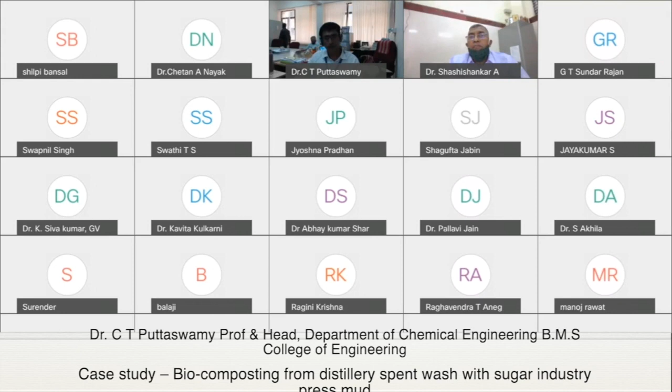It's my privilege to introduce the speaker of today's afternoon session, Dr. C.T. Puttaswamy. Dr. C.T. Puttaswamy graduated in chemical engineering from Bangalore City, and he did his post graduation in industrial pollution control from NITK Surathkal, formerly known as KREC Surathkal. He did his doctoral program with the PhD title Process Optimization and Ethanol Production from Hemicellulose, Bioenergy and Environment from Visvesvaraya Technological University, Belagavi.

He has more than 4 years of industrial consultancy experience before he joined in September 1999. So he has more than 20 years of experience teaching graduate as well as postgraduate environmental engineering and biochemical engineering students. He has guided more than 40 UG and PG final dissertation works, and he has more than 15 international and national publications.

One of the important awards he received is the State Environmental Award 2017 from the Department of Forest, Ecology and Environment, Government of Karnataka, with a citation of 1 lakh, in the individual category, which gives us the honor to be his colleague. He has carried out more than 15 lakhs worth of consultancy works, and he is affiliated to many professional bodies. He was a TEQIP 2 nodal officer, and moreover he is a man of simplicity and a down to earth person, which adds a feather to his cap.

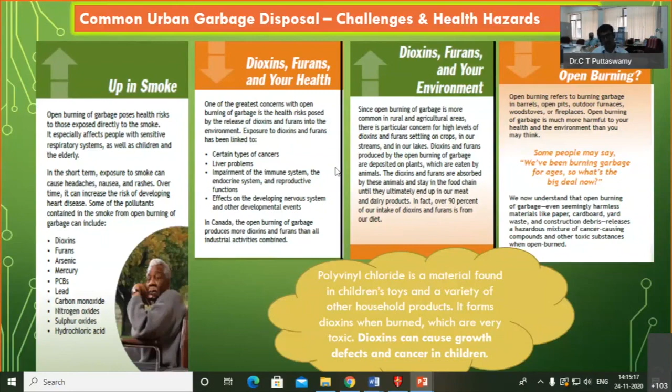So we made an attempt to check whether furan and dioxin were present. But with the available monitoring protocol, we found there was nothing, because no dioxin- and furan-producing material was incinerated in the magnetic pyrolysis. That might be the reason for the absence.

This is the Ecomac municipal waste decomposing machine. This is why I called it a marvel technology. It is a technology developed by a Chinese company, and they transferred the technology to India. A company bought this technology, and they are fabricating it in India, in Bangalore, Karnataka. They are supplying it to some municipalities, some industries, and decentralized waste management facilities.

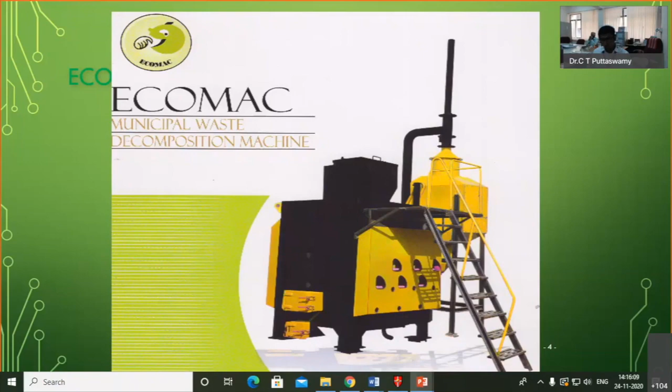But why I call it destruction is because I'm burning rich organic material and not getting anything out of it. That is why it is called destruction. This Ecomac is a unique garbage decomposition equipment using magnetic heat technology, called magnetic pyrolysis or magnetic plasma incineration. It works without using any fuel such as oil or electricity. As I told you, it's developed in China.

These are some of the features of this system. Magnetic heat technology, and only the control equipment, the scrubbing operation, requires electricity, and that too with negligible power consumption. The feed garbage is the fuel for the equipment; whatever garbage we use will act like a fuel. We can call it mono or co-incineration. It reduces landfilling substantially, because waste dumped in a landfill takes many years to degrade, and recovery or remediation is a cost.

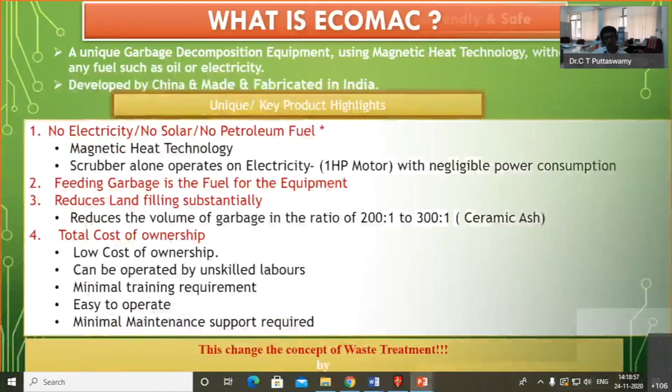Next one, what all it can incinerate, this magnetic pyrolysis actually. Except glass and construction C&D waste, construction debris, and maybe plastic. Even plastic also it will incinerate, but they avoid it actually. All these, even leather, plastic, vegetables, food waste, or maybe animal bodies, or to some extent other mixed waste. You can see all these, maybe a fiber.

Only the moisture is the criteria. We cannot put waste with moisture more than 65%. Anything which is less than 65% moisture can be incinerated using this magnetic plasma pyrolysis. What cannot be incinerated, as I told you, is building debris, stone, metal scrap, metal cans, and glass, which cannot be used for incineration.

Maybe we can try. It might be converted into some solid ingots. It might not be completely converted, that's what I feel actually. Seeing the system, the technology, it can be reduced into a solid mass. I think if it is tried, it can be checked actually. Somebody has to do it.

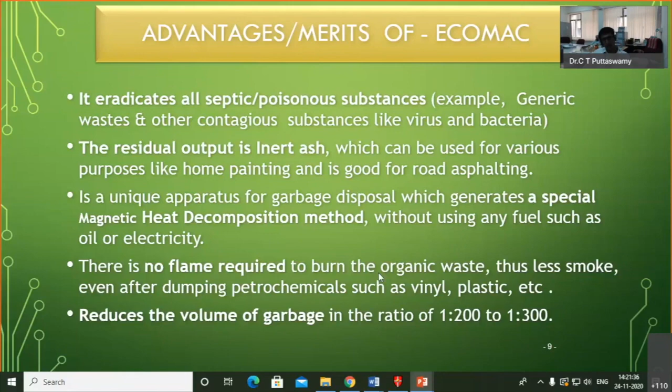So it's a unique apparatus for garbage disposal which uses a special magnetic heat decomposition method without using any fuel such as oil or electricity. There is no flame required to burn the organic waste. Thus, less smoke, and even petrochemicals such as vinyl and plastic can be used. The garbage is reduced to less than 1%, and the organic waste residue can be used as a byproduct.

There are only two outlets. One is in the bottom, where the ceramic ash comes out. In the control system, there is some oil which gets condensed, and in case any plastic or polymer material is there, a greasy material comes out along with it. The remaining is the gas which goes through control equipment.

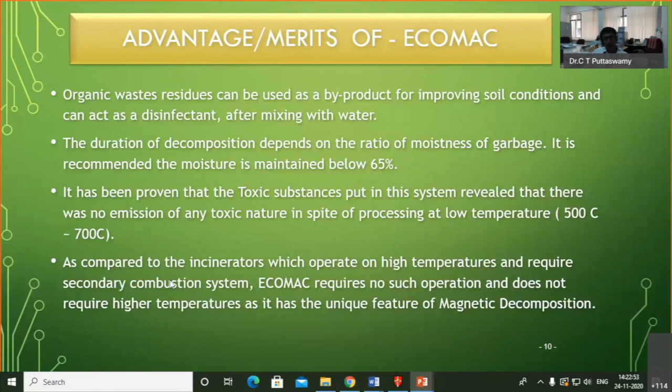There is a HEPA filter and a scrubber arrangement. After we got into this project, we suggested a way to destruct the furan compounds. We have provided a heater, a kind of thermal destruction system, and this system can run up to 500 to 700 degree temperature.

So a very small amount of air enters into a very high magnetic field created in the magnetic chamber by permanent magnets. The oxygen dissociates into positively and negatively charged ions, which constitute the plasma state. Theory says plasma states occur only above 1000 degrees centigrade. There are some plasma incineration technologies available for hazardous waste incineration.

However, I have gone through many literature, and we made a report while submitting to the Pollution Control Board. This Chinese company also has a patent on this technology, and they claim a plasma state is generated even at 500 to 600 degree temperature. That is the marvel, what I call it. Due to the abundant negatively charged oxygen, the organic matter reduces into ash in the presence of heat due to the magnetic field. That is the main theory behind it.

The heat generated is maintained between 400 and 600. This temperature can be varied depending upon the amount of oxygen entering the system. You don't require any blower. There is one vent; you have to open that vent. Because of the temperature, there is a starving environment, and because of the negative vacuum pressure, oxygen will be taken into the system on its own. Only the amount of oxygen required enters.

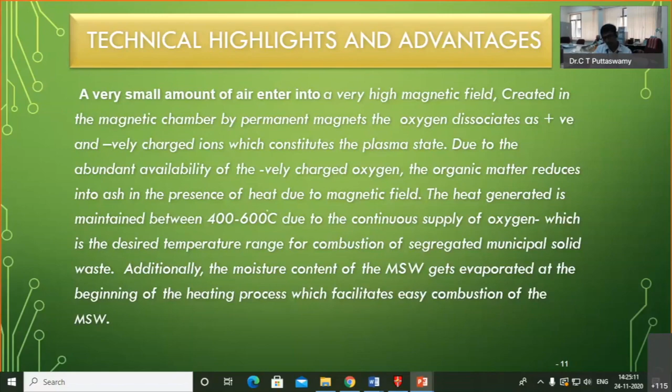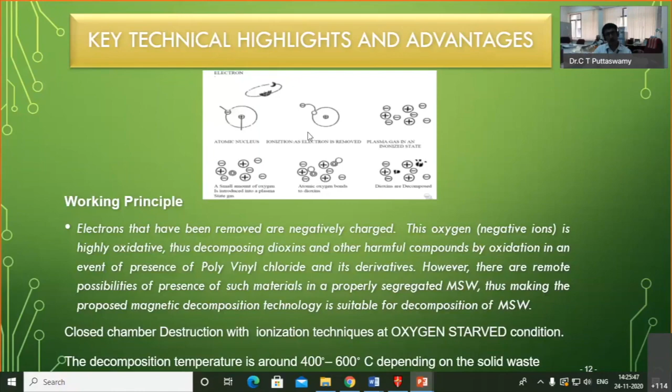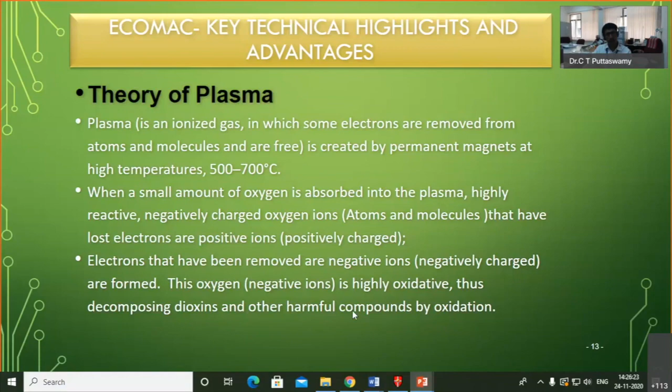So the theory, as I told you: plasma is an ionized gas in which some electrons are removed from atoms and molecules and are free. It is created by a permanent magnet at high temperature. There is a magnet inside that breaks the oxygen, and then positive and negative ions are generated, and then it decomposes using a highly oxidative, starving environment. That is the negative ionic component. So it says it decomposes dioxin and other harmful compounds by oxidation. That is what it claims.

This is the machine where we have done a feasibility performance evaluation. It is installed in Shivamogga, and this is the hopper to put the solid waste. You have to climb like this and then there's an opening there.

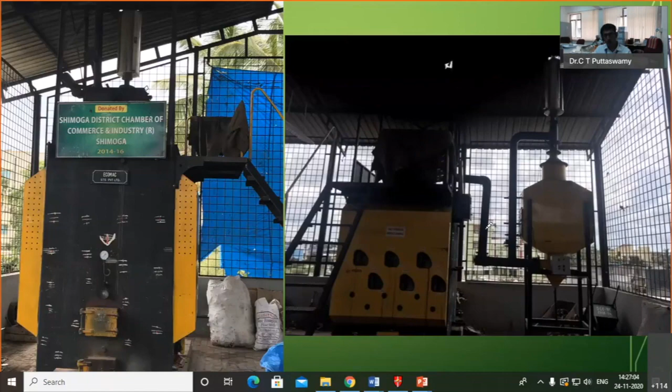Somebody... some problem. Yeah, it's all right now. Sorry. Now I'm audible. Yes, sir.

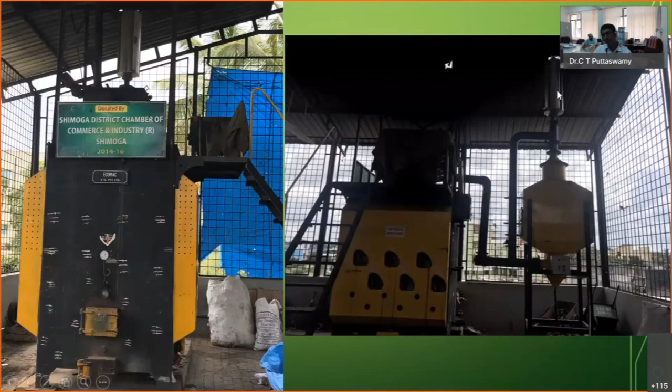This is the system. As I told you, this is the hopper, and the solid waste will be placed here and then goes to the system, and then there's an exhaust which is connected to the scrubber. And there's a HEPA filter in the outlet to reduce. We suggested, because there's a 500-600 degree temperature and a loss of some liquid here, to place a heater with a 1000-degree temperature, so that any dioxin and furan generated can be disintegrated here itself rather than going after the scrubber.

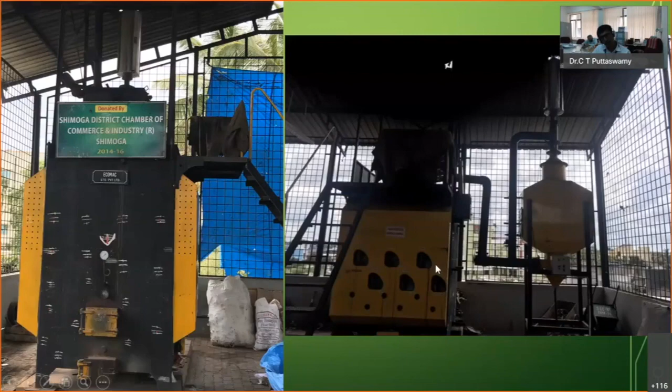However, there was no provision here, and in the subsequent equipment they placed this heater before the scrubber and filtration. Since the scrubber is there, there's a loss of some moisture, and makeup water has to be added. We also suggested a condenser after this heater, so that a waste heat recovery system can be implemented, but this has not materialized. However, there are a few systems running like this. So this is the heater provided to destroy the furan and dioxin in the exhaust system.

Above the roof there is a 5-meter chimney connected to the exhaust. In the chimney, only at startup and shutdown of the system you will get some kind of fume, and during the stabilization, decomposition and pyrolysis periods there is no smoke coming out from the system. That's how it is.

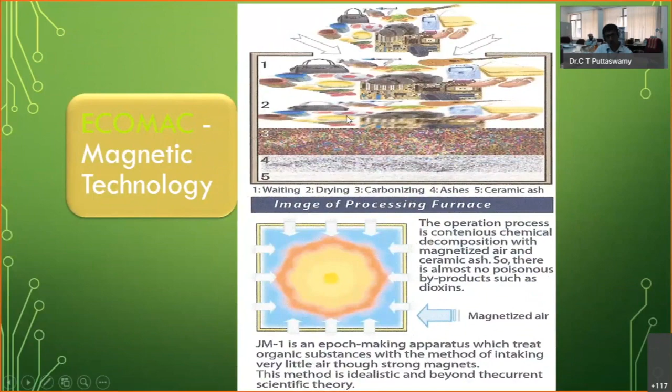Whatever the liquid, as I told you, there's oil or maybe grease kind of things which is going to be collected here. And then the gas collected is passed through a 3-stage filter and sent to a 1000-degree centigrade heater to remove other chemicals and odor which might be generated.

However, we have done the stack monitoring on a few occasions, and we found that there is no furan or dioxin generated from the exhaust gas. Also, in this system they have avoided plastic. So we have to check by putting plastic and other polymer material, or any rubber material, whether any furan gas is generated.

But they are not permitted to incinerate plastic, because if you incinerate plastic, the categorization is different, the licensing is different, and the procedures are different. That is the reason it is not permitted in this activity. So we could not find any furan or dioxin in the process itself.

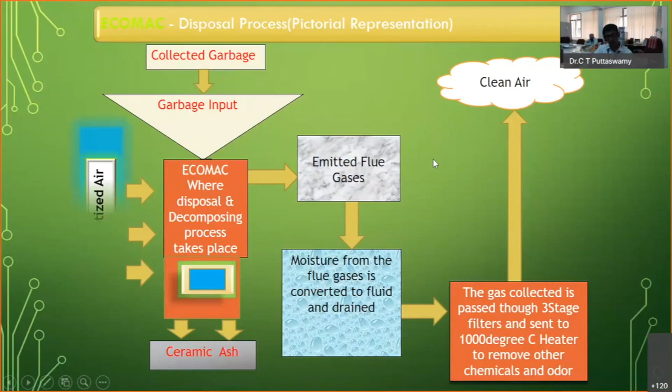So I can compare a conventional incinerator and the Ecomac pyrolytor. This is self-powered; there is no electricity involved, whereas there you require some fuel, liquid or electricity. Temperature here is maintained at 500, while there the primary chamber is 800 and the secondary chamber is 1000 degrees. The residence time is almost the same in both.

This is magnetic heat decomposition, thermal decomposition; that is flame combustion, so you require flame to combust. Here also flame is generated initially, but later it is decomposed in a starved environment in the system. Here a basic dry scrubber and thermal destruction is required, and there a secondary combustion system with filters, cyclone separator, bag filter, and sometimes scrubbers are required, a series of control equipment.

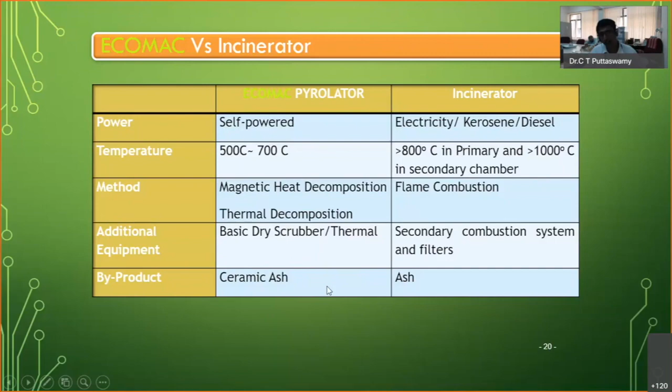There, a lot of byproducts are generated and management is required. Here there is no byproduct and no management required. Ceramic ash is produced in both cases, but the quantity is very less here: 5% ash there, less than 1% ash here. That is the beauty of this disintegration.

So it decomposes all organic substances. It does not decompose organic substances which contain, as I told you, greater than 65% moisture, substances packed with water or bottled water. If you put that in, it is not going to be incinerated or decomposed. Rather than incineration, I can call it thermal decomposition. For smooth operation, organic substance should be packed in the furnace as tightly as possible.

Some inorganics, as I told you, cannot be decomposed: glass, metal, soil, rock, ceramic. It is not possible to decompose them in this. Moreover, it does not decompose substances generally unaccepted by society, which are volatile and explosive based. Hazardous waste cannot be incinerated in this; it is not designed for that purpose.

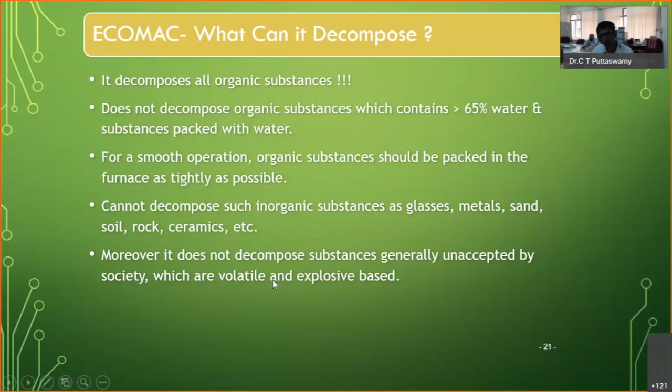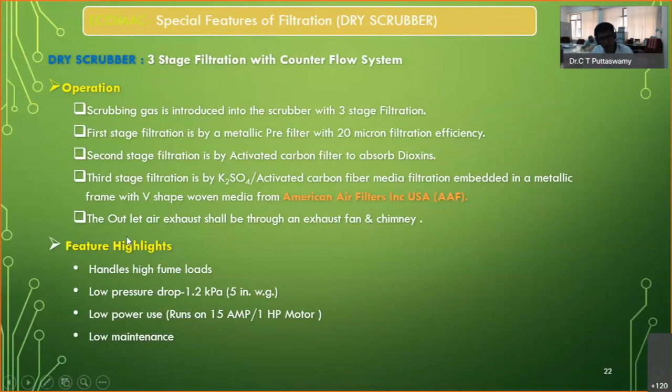So this is the control equipment being used here. There is a 3-stage filtration. This is American Air Filter. This is a pre filter, with 20 micron filtration efficiency. And these are some of the highlights of the filtration system.

This is the filtration CERASORB, meaning a carbon adsorption mechanism. Nanotechnology is adopted here. It is impregnated with potassium permanganate to oxidize the individual pollutants. When the pollutants come in contact, they get disintegrated by this impregnated nanotechnology filtration method.

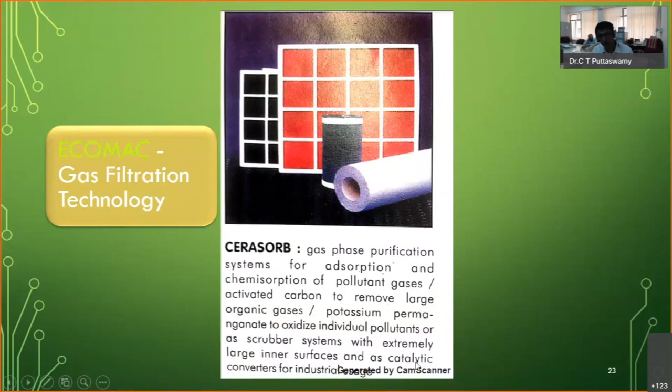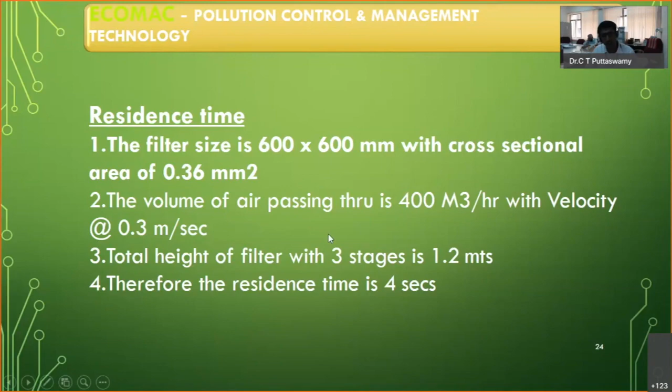As I told you, the residence time maintained here is maximum 4 to 5 seconds. The volume of air passed is around 400 cubic meters per hour with a velocity of 0.3 meters per second. Depending upon the capacity, the chamber size may vary, the air flow rate may vary, or the magnet requirement may vary. Otherwise there is not much difference; like a tailor, size can be varied based on the requirement.

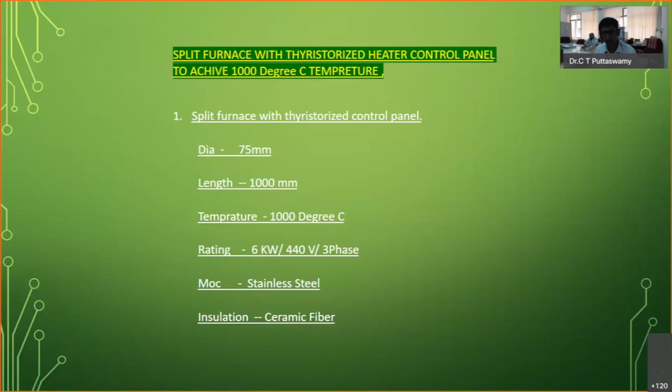Split furnace with thyristorized control panel. There's also a DCS control system provided, to open the air valve in case the temperature reduces, and if the temperature increases, you can cut the valve. Distributed control systems can be adopted, at cost, obviously. So this is the additional system we have proposed for them for destruction of furan and dioxin.

However, the system was not generating. Then we told them there's no point wasting energy unless there are traces of furan and dioxin. So I think they might be running this or not running it. Really, I don't know now, it was two years back this study was done.

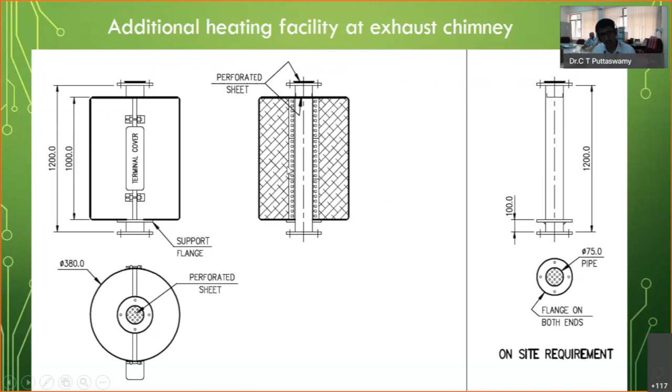So, how is the generation of negatively and positively charged oxygen achieved? Under a very high magnetic field, oxygen dissociates as positive and negatively charged ions, which constitutes the plasma state. Due to the abundant availability of negatively charged oxygen, the organic matter gets reduced to ashes in the presence of heat due to the magnetic field. That is what was already discussed.

Plasma is widely considered to be the fourth state of matter due to its unique properties. Plasma is a gas in which the atoms are ionized, meaning there are free negatively charged electrons and positively charged ions. However, these positively charged ions will be released along with the flue gases, and negatively charged ions will be used in the decomposition process.

This department asked some details before presenting, and then we made justification. They asked for a comparison, since the composition of India's solid waste contains all stuff including metal, glass, rubber, etc. Hence the feasibility of this machine to handle composite waste needs to be justified.

So we told them, though there may be some inert glass or various other composition, this system is not using any other material like can, metal, plastic or anything. Only organic decomposable matter is being used. Whatever moisture is there gets heated, vaporized into water vapor, and then subsequently takes the heat to a higher temperature and decomposes.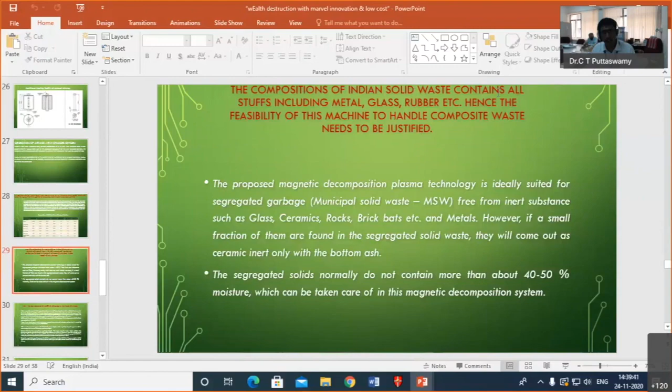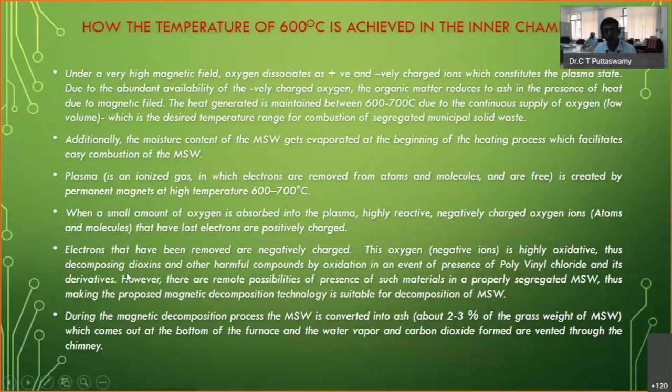Again, there is one more question - the composition of Indian solid waste, this is the same thing. They asked how the temperature of 600 is achieved in the inner chamber. We explained the same thing - whatever theory and working principles we already explained, and we were able to convince them that this is what is going to happen.

And the nature and life of the magnet used in the chamber - they asked this question too. Now, a magnet is a material or object that produces a magnetic field. This magnetic field is invisible, but it is responsible for the most notable property of a magnet - a force that pulls on ferromagnetic materials such as iron and attracts or repels other magnets. The overall strength of the magnet is measured by its magnetic moment, or alternatively the total magnetic flux it produces. The local strength of magnetism in a material is measured by its magnetization.

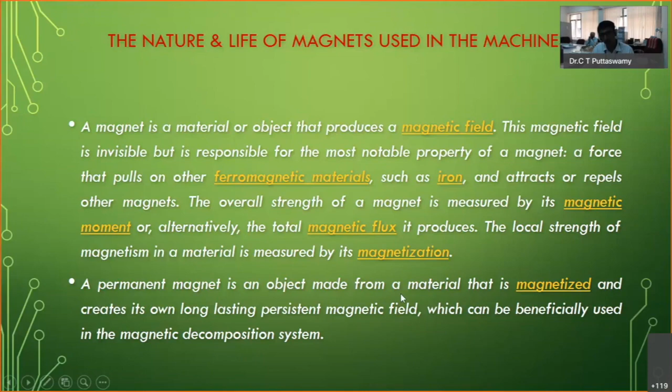A permanent magnet is an object made from a material that is magnetized and creates its own long-lasting, persistent magnetic field, which can be beneficially used in the magnetic decomposition system. The life is still not known, maybe it depends on the performance or the pyrolysis or plasma incineration capacity - these things have to ascertain the life. However, literature says the life of this magnet is around 25 years, after which it can be replaced. Maybe even the system itself may not have a lifespan more than 25 years - either the metal or many parts can become obsolete, or new technology or better innovation might come. So we informed them of this.

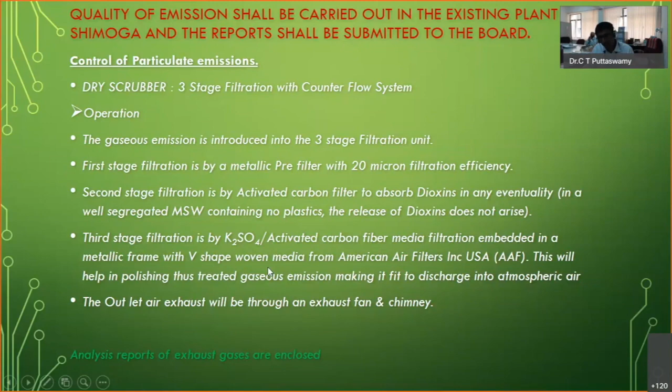Quality of emission testing shall be carried out at the existing plant in Shimoga, and the report shall be submitted to the board. So after suggesting and modifying this equipment, we did a laboratory test.

Even in the laboratory, analysis was done on a stack flue gas sample, and we could not find any polychlorinated dibenzo-p-dioxin - that is dioxin and furan. It is below detectable limit in some cases, and in others it is around 0.008 nanogram per kg, and 0.001 nanogram per liter when converted - this was done in ash and in the scrubbed liquid.

Okay, this is done in the flue gas which is going out of the chimney actually. This is what we did. I thought I'll share this Marvel technology with you so that it may be useful, and maybe somebody can work on this also. So yeah, thank you, City sir.

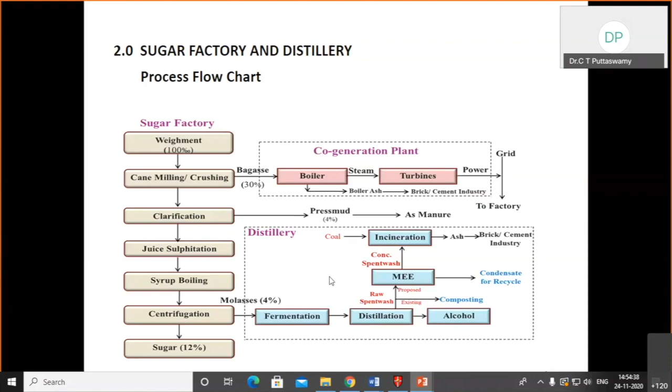So I'm going to use this compost after biomethanation or concentration, along with the press mud and the ash from various sources. There's also one more waste coming from the fermentation yeast, which also goes to composting.

This is the material balance that has been done. I won't go into detail about the material balance, but I hope I've shown what's required and where the inputs are coming from for my composting process.

So, composting of distillery spent wash using the sugar factory press mud. Distillery spent wash is among the most recalcitrant industrial effluents - very high in organic content, odor generating, and high in color. This is why they call it recalcitrant.

It has a BOD of around 40,000 to 50,000 milligrams per liter, and COD of 1 lakh to 1,20,000 milligrams per liter if it is spent wash. If concentrated, it can go up to even double that. So for a distillery attached to a sugar factory, the composting system is a novel approach to spent wash management.

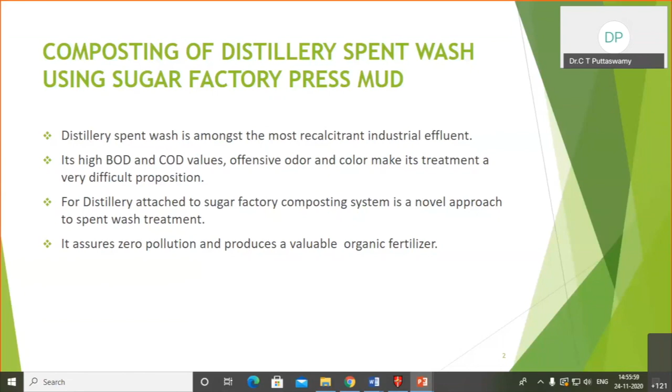Okay, so it also assures zero pollution, because all the liquid or semi-liquid which is generated is consumed by the dry solid, that is pressed mud and other ash, and this can be converted into a valuable organic component.

This is also called solid state fermentation. There are liquid state fermentation, solid state fermentation, continuous fermentation, and batch fermentation. It falls under solid state fermentation, because we are going to use slurry as well as pressed mud, which is solid.

This makes use of other organic waste, that is sugar factory pressed mud, fermentation yeast, or the boiler ash generated in case of an agro-based boiler fuel. It cycles back to the soil organic matter and part of the nutrients removed from the soil by the crop, in a form that restores the delicate ecological balance of the soil. Soil requires rich nutrients, that is the NPK value.

Sugar factory and distillery symbiosis. That means they should go hand in hand. They cannot be separate, or if they are separate, there is a possibility of large environmental impact on society. That is the reason both should be together, so it can be managed, and this organic matter can improve the soil's chemical, physical and biological properties.

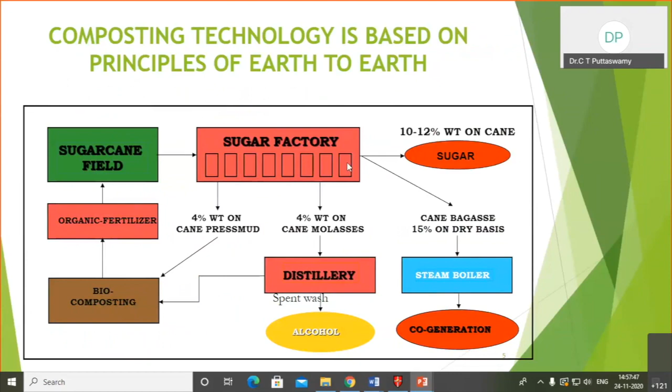So this is pressed mud, a source of organic matter, and it acts as an absorbent for the spent wash. They have made windrows, as they call them. On the windrows, the spent wash is going to be sprinkled. Once it is sprinkled, there is an aero tiller. The aero tiller mixes it, and it is applied regularly, mixed, and then left for decomposition or conversion.

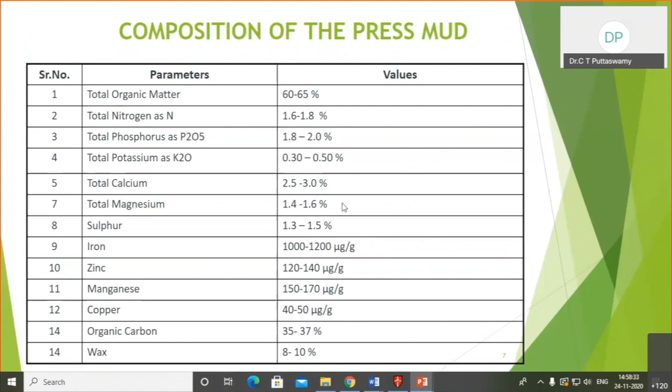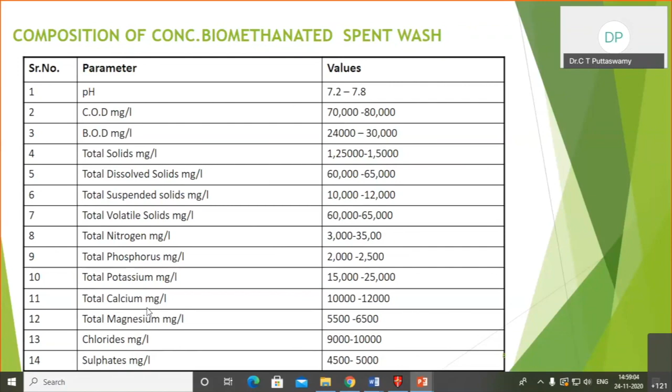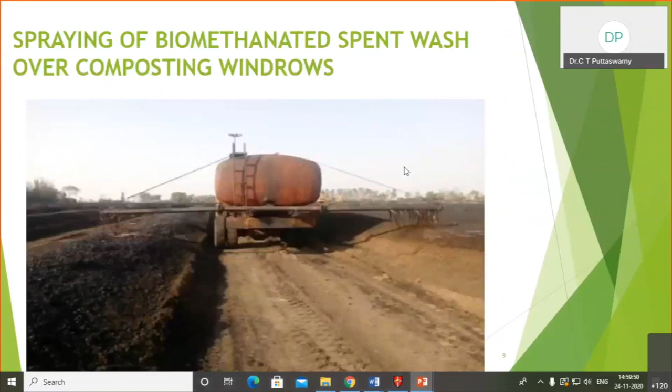The composting process, the cycle as it is called. In 1 week, what will happen? In 2 to 7 weeks? And in 8 weeks? It takes about 8 weeks, 60 days, to complete one cycle, with the following activities. In the first week, the windrows will be made, maybe 2 or 3 meters height, maybe 1.5 meters, and the length depending on what is available, 100 meters, 200 meters, or whatever.

First pass of the aero tiller to reduce the moisture content in the windrows from 70 to 50%. Inoculation with microbial culture, that is 30% suspension in water. They use liquid live microorganisms in some cases. And aero tilling for proper mixing of the inoculum. First they do the seeding, mix it, and remove the moisture. They don't apply spent wash here; only from the second week are they going to apply spent wash.

Effluent spent wash spraying, aero tilling, and maintenance of moisture between 50 to 60%. Effluent spraying is done thrice a week, so on alternate days. The aero tiller passes after every effluent spray. Trimming of windrows after every aero tilling to reshape them into a triangular shape. Like this they have to make it, that's why they have to do the trimming also.

Aero tilling. Then at 8 weeks, curing, aging and drying happen. After 7 weeks, optimum moisture content is maintained.

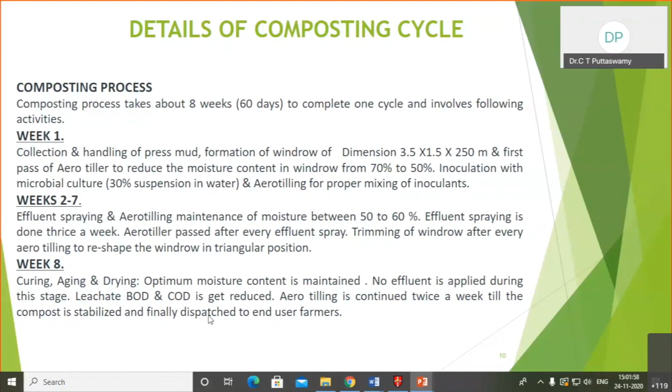Actually, the temperature initially may be 25, 30 or maximum 40. Once you inoculate it, it may rise to some 35, 40. And then during this process, it may rise to 45. And at the time of complete decomposition, it may even go up to 60, 65 and 75 degrees. Once the temperature drops, it shows that decomposition is completed, and then it is ready for screening or disposal or dispatch. Okay, this is the composting process.

So, factors influencing composting. As you know, the particle size should be small; with a smaller particle size you will have more surface area and faster decomposition. And this is a very critical parameter that has to be maintained: a 25 to 1 carbon to nitrogen ratio. pH should be slightly acidic, and then it can rise to alkaline. The windrow dimensions have to be maintained, and the temperature has to be maintained at 50 to 65 degrees. That is the most important. Moisture should also be maintained, at 50 to 60.

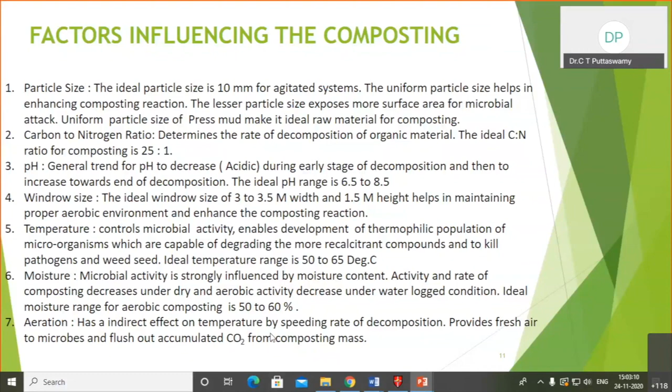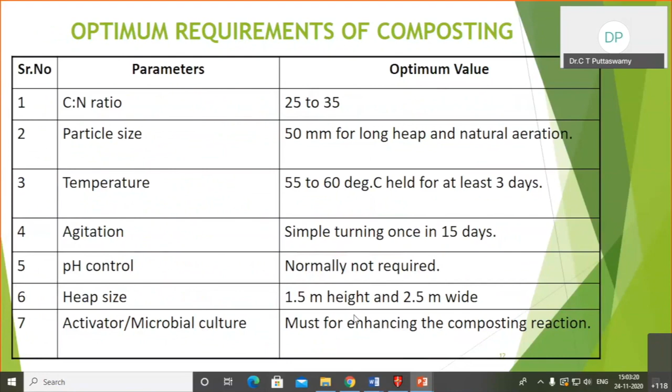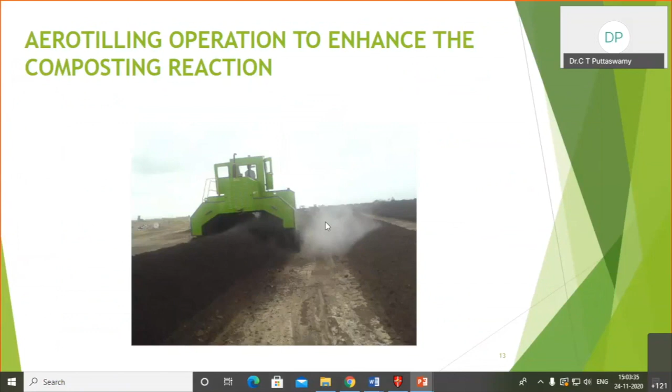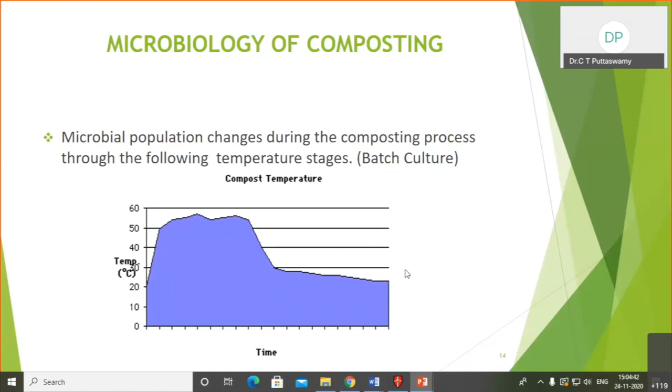As I told you, there are two types here. Psychrophilic bacteria may not be used because of the temperature; even whatever is available might get killed. Only the mesophilic and thermophilic bacteria work. Generally it contains bacteria, fungi, or actinomycetes. In the case of bacteria, Bacillus subtilis; sorry, I have not done italics here. Fungi is Aspergillus fumigatus, and actinomycetes is Streptomyces. These work depending upon the temperature conditions, thermophilic or otherwise.

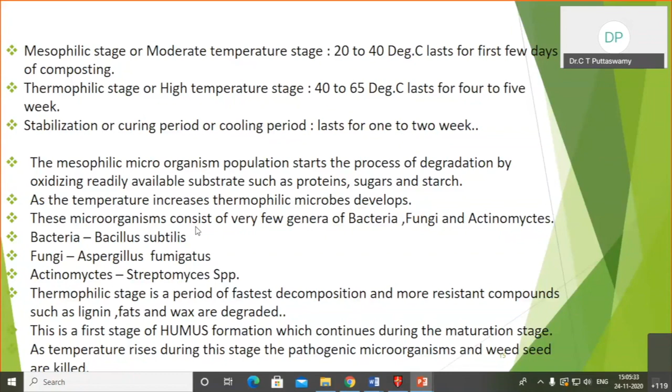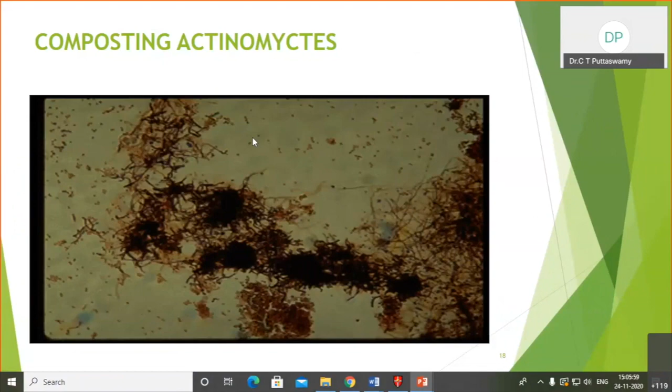When is the compost ready? As I already told you, in around 8 to 10 weeks the compost is ready, and the bad odor is reduced. If there is any micronutrient scarcity, they will test that and add some bauxite or rock phosphate or other natural nutrients, and then it can be sent for dispatch.

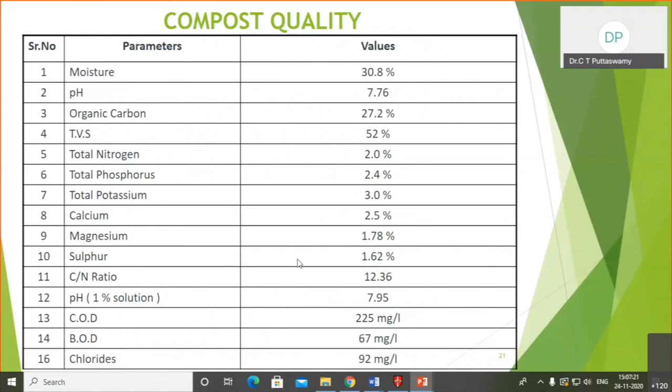So this is the compost quality that is required. I'm going to share this. You can check the moisture, pH, and all other parameters. This monitoring is required. So, the features of the compost process.

So what are the advantages? It is a zero pollution process. BOD of effluent is destroyed in this decomposition. That is natural decomposition. All the degradable organic material is oxidized to humus. That is a fertilizer, manure.

No odor nuisance. Of course, there is some odor nuisance, but it can be minimized by applying some odor inhibiting components. Fly nuisance also exists to some extent, but we have to optimally maintain the moisture and then we can reduce the fly nuisance. The product is dry, baggable, and has a high nutritional value for all types of crops and soils. Compost is free from weed seeds and pathogens.

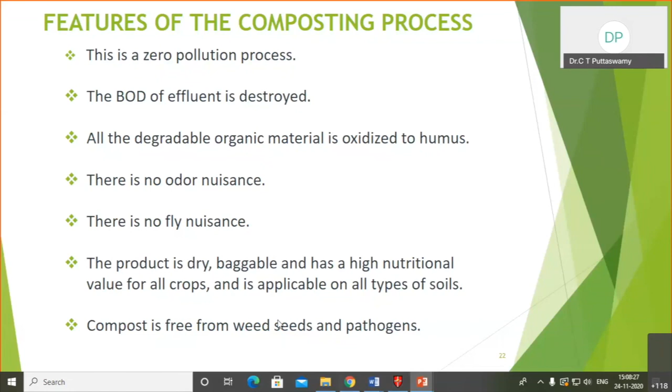Obviously, because pathogens or weed seeds will not survive at a higher temperature of 50 to 60 degrees. That is the reason it's free from them, and even pathogens that come from excreta and other sources are avoided here. So they may not be present in most cases.

A very interesting material balance has been given. See, the crushing capacity; he has given the calculation of how to calculate and what is the requirement. I may take another 10 minutes, not more than that. Crushing capacity of 5,000, days of operation 180. Total crushing 180 into 5,000 is 9 lakh metric ton. Press mud produced from 9 lakh is around 36,000 metric ton, and the moisture content of press mud is 70%. From 5,000, you can go up to a 100 KLPD distillery.

From that 100 KLPD, 1 liter of ethanol gives you 10 liters of spent wash, 1:10. Nowadays it has come down to 1:5 or 1:6. They are able to achieve that because of development, recycling and other things. However, in earlier case studies, worst case, if you consider 1:10, then it is 1,000 meter cube. Solids are 6%.

In case it is going for biomethanation, an anaerobic digester will be used, and they are going to take the methane. Methane is used in the boiler. Volatile fatty acids and other things will be destroyed in the anaerobic digester. Generally, UASB digesters are used, upflow anaerobic sludge blanket reactors.

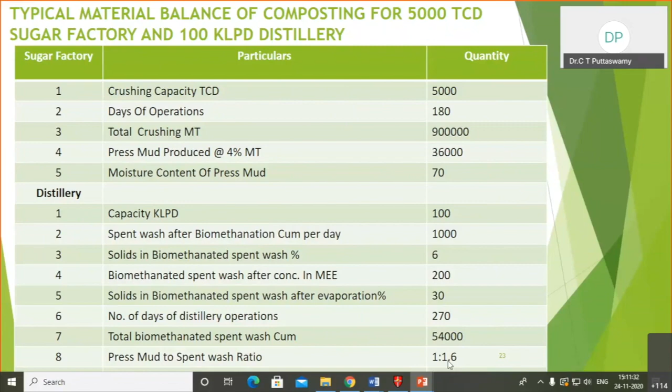The total biomethanated spent wash available is 54,000 cubic meters, if you multiply these. And the press mud to spent wash ratio required is 1:1.6. That is the reason. Even if it is generated more, 54,000 meter cube and 36,000 metric ton. So 1 kg requires 1.6 liters of spent wash. That is the requirement.

So here the mass balance of composting for a 5,000 TCD sugar factory and 100 KLPD distillery is done. As we calculated, we are going to get 33,750 metric ton press mud. Solid content is 30, and the total solid in the available quantity is this much. Spent wash is 54,000, its solid content and total solid content. The total solids come to 26,325, and annual compost production with 20% loss as CO2. We need to consider loss and moisture content: 20% means 0.8 and 35% means 0.65.

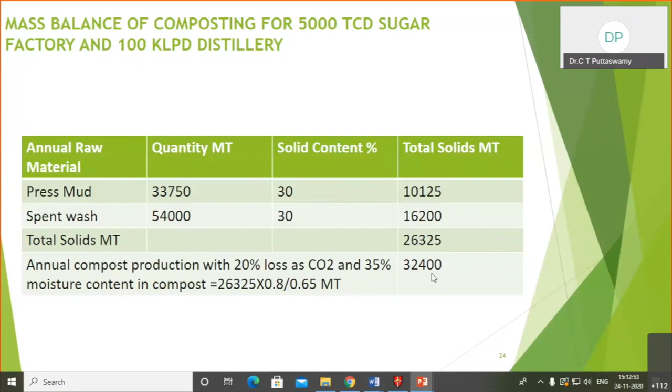The total quantity after the oxidation of the volatile solids comes to around 32,400 metric ton in a year. That is what we are going to get. From this 32,400 metric ton, if you sell or manage it, we can estimate the cost required per ton of process. So here, because of my PPT, it is going down.

I think now, yeah. So the financial requirement. Okay, so there is a land, 16 acres. I consider 6 lakhs per acre because it is in a remote place. Compost yard concreting, that is some cost. Like that, we have taken all the costs which are required. Even plant and machinery is required. It is around 680 lakhs in total. 6 crores 80 lakhs is the total cost required to plan this compost facility.

Okay, and then the cost of production of compost and profitability. So this is the cost. This is the total press mud what we have used actually. And then rate of press mud, total cost which is going there, cost per metric ton we have calculated. And then compost operating cost. So it is like other moving parts and other machineries, salary, wages and other operating costs, which per metric ton is 275. It is considered. Then this is the cost.

Interest on investment, 10% on 680 lakhs, because I need to consider the return of interest actually. That is the rate of interest, and this is the cost which is there, and per metric ton is like that. If you consider all this and then divide this by 32,400, you will get 118 rupees per metric ton. So you can sell this at 1,000 rupees. Saleable value of 32,000 metric tons of compost at 1,000 rupees.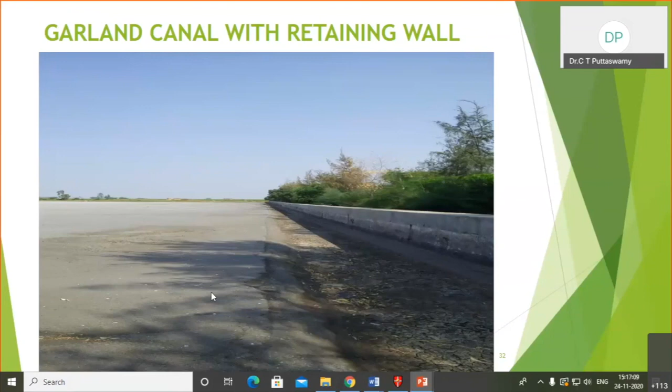Nowadays this spent wash collection lagoon should not be more than 15 days storage capacity. They are reduced, and they are asking for covered storage, and sometimes they also insist on covered composting. However, whatever they are suggesting may not be technically and economically feasible to cover 20 acres, 50 acres, and the decomposition time also is going to be reduced if so. This is a photograph showing sieving of compost and ready compost. So this compost is ready for bagging.

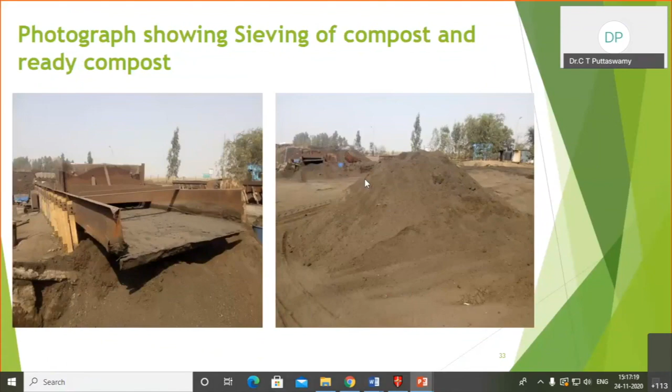Okay, so limitations of composting. See, we cannot tell only the advantages. There are some disadvantages also. It requires a huge quantity of solid organic residue, suitable for distilleries attached to a sugar factory. Large land area is required for the compost yard. Compost operations are restricted to only the dry season. Rain does not allow the compost operation because of contamination and other problems. Operations largely depend on casual labor or temporary labor.

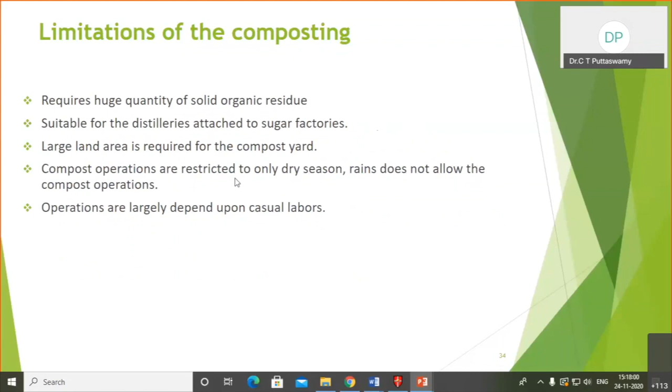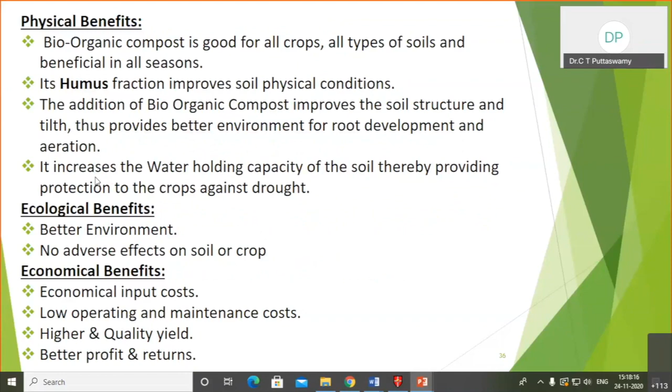Benefits of compost. These are the limitations and this is the benefit. You already know most of the benefits from the previous slides: the physical, chemical, ecological and economical benefits. The chemical benefit is because you are going to avoid inorganic or chemical fertilizers. And the compost benefits ecologically over 3 to 5 years. Compared to other fertilizers, this organic compost increases the production of all crops by 15 to 20%, reduces the use of chemical fertilizer by 15 to 25%, and reduces the pesticide